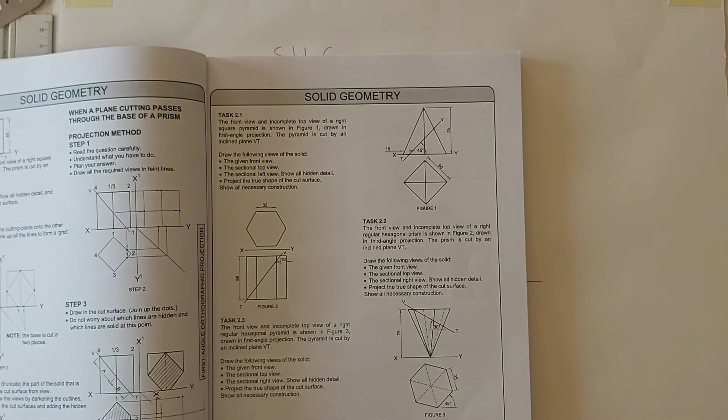This is just a video to help you with your first task that we handed to you. It's the solid geometry, task 1. If you have a look at the task, you will see that they provide you with a front view of a square pyramid as well as a top view.

Now what they ask of you is to do a given front view, a sectional top view, and a sectional left view that will be on the right hand side. Why? Because it's a first angle orthographic projection, and then of course you have to do your true shape.

Right, now just about the question itself, please remember that if they give you the base length, in this instance 50, the base length is from that point to that point. Because a common mistake that you guys tend to make is to measure 50 from that point to that point, which is incorrect. The base length is the base length over here.

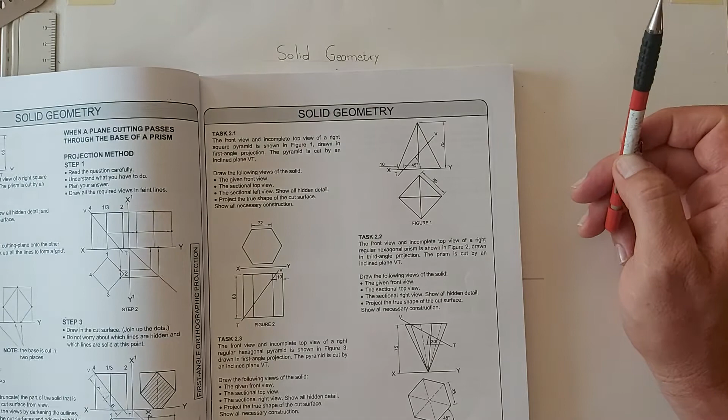Right, the axial length is the height provided here, which is 75. And then you have a cutting line VT, which is provided, and they give you the measurements for you to be able to do this line, which I'll show you how to do now. The measurement is 10 millimeters from there, and then you have to draw this line at an angle of 45 degrees. At this stage you're supposed to already be able to do this drawing, as I already did it, because it's grade 10 work.

As you can see, I already constructed my front view and a top view. Now you will see the top view is very light. The reason for that is very simple. We still have to do a sectional top view, so there will be a part that will be visible and another part which won't be visible at this specific stage.

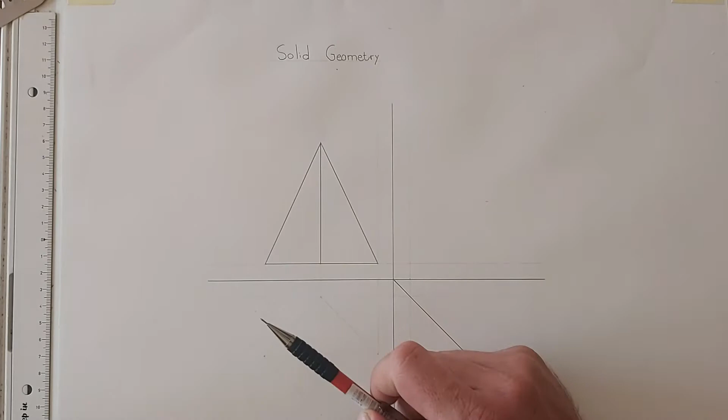Right, so first things first, let's start by adding the cutting plane. For the cutting line, they provide you with a measurement of 10 millimeters to the side and then a 45 degree line. So my first step will be to measure 10 millimeters to the side, and then on that baseline, I'm going to draw a 45 degree line. And I'll name this line VT. It doesn't really matter what you name it, but in the book example, it's VT.

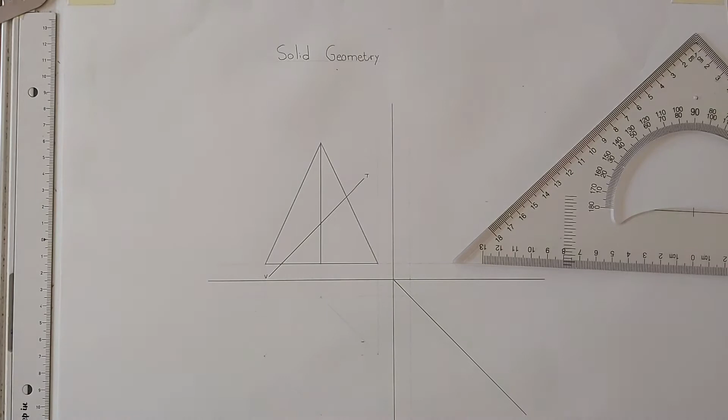Right, now the number one rule when it comes to solid geometry is to number. At a later stage in the drawing, you will see the reason behind the numbering. So let's start off with number 1, number 2, 3, and number 4. Remember this is a corner as well. It's the top point of your pyramid, so I'm going to name that point X.

Now I'm going to do the same on the front view. I'll start on the left hand side, which will be number 1. Then I'll go to the midpoint, which will be 2 and 4 at the bottom, and of course X, which is at the top, and then number 3 on the right hand side.

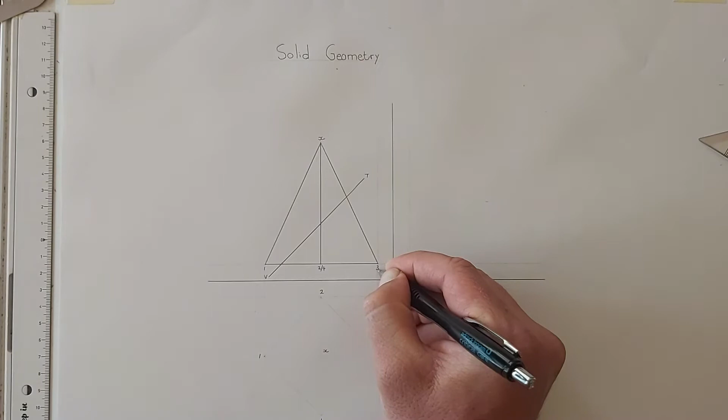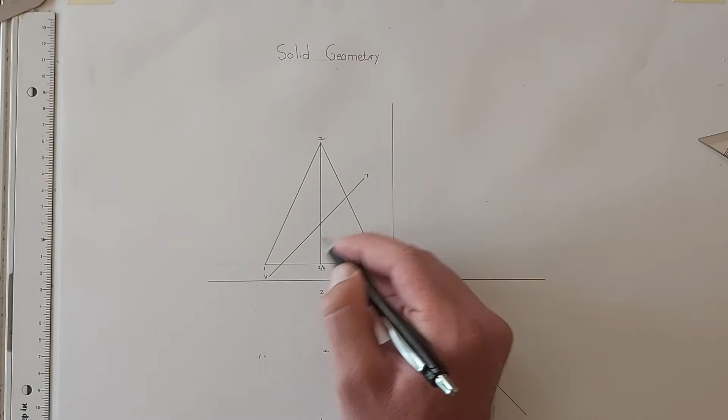Right, now on my solid piece, there are 3 points where my cutting line cuts my solid. The first point over here I'm going to label A, the second point B, and the last one C. Those are the points that I'm going to make use of when I project over to my top view to get my cutting points.

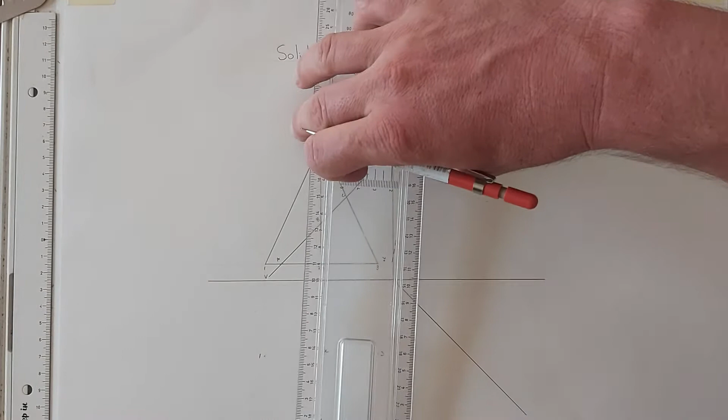So now, first steps first, I'm going to start off by projecting point A, which is this point here, down to my top view. Now you will notice that if I try to project B downwards, it won't have any effect, so I'm going to leave that one out for now. Then I go to point C and project it downwards.

Now this is very important. This is why we need the numbering, because at this stage you will see that between X and 1 there's no cutting point. Thus between X and 1 there won't be any cutting points, but between 1 and 2 and 1 and 4 there is a cutting point, which is cutting point A. So between 1 and 2, it cuts there.

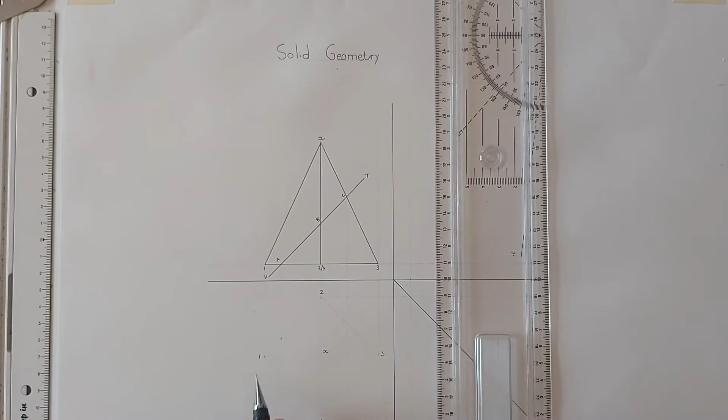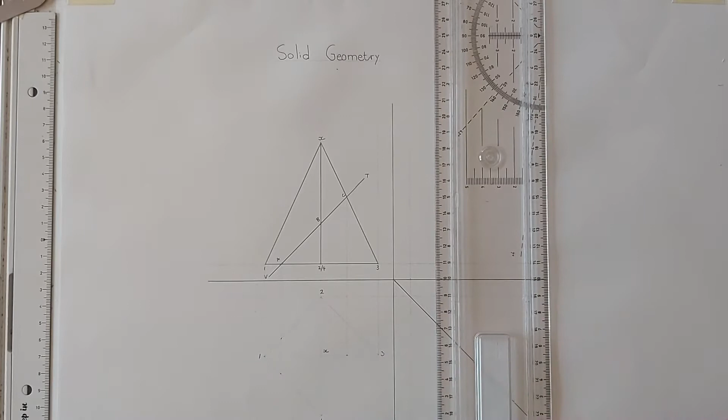Between 1 and 4, it cuts there. So that's my 2 cutting points. Right. With B, as I mentioned, no effect, which we'll get to at a later stage. Okay, now I'm going to C between X and 3. If I project it down between X and 3, this will be my cutting point. Okay, so now I've got 3 cutting points, but I still need cutting point B.

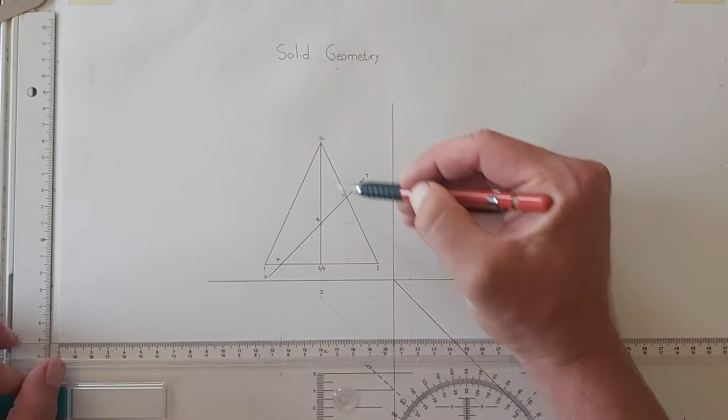Okay, for me to be able to construct that, I have to make use of my projection lines again. So I'm going to project point B over to a line that's at a slant. In this case, I'm projecting it over to line X3. There it makes contact with line X3. I'm going to project it down 90 degrees. So I'm projecting it down to line X3 again, as it is over there.

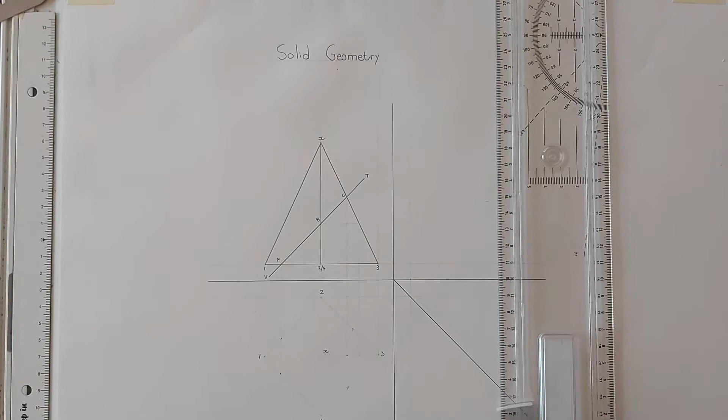Now, my next step, parallel to this side and parallel to this side, I'm going to draw a line that makes contact with that point that I just determined. Okay, so I'm projecting this line over, and I'm also projecting this line over. Constructing 2 parallel lines. So that line is parallel to that line, and this line is parallel to this line.

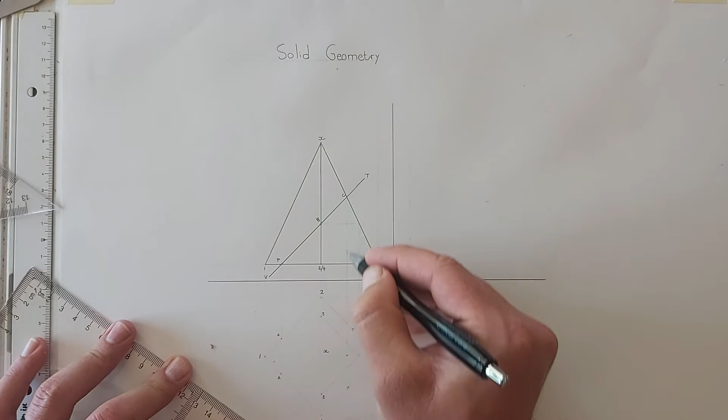Okay, now there where it makes contact with X and 2, because remember B cuts on X2 and X4. So X2 cuts there, and X4 it cuts there. So now when I've determined all those points, now I'm going to connect all of them. Okay, to simplify it for yourself even more, you can do the following. Say, right, this point here is A and A. You can do it as you like. This point here is B and B. And this one here will be point C. Okay, now I'm going to connect all of these points with one another.

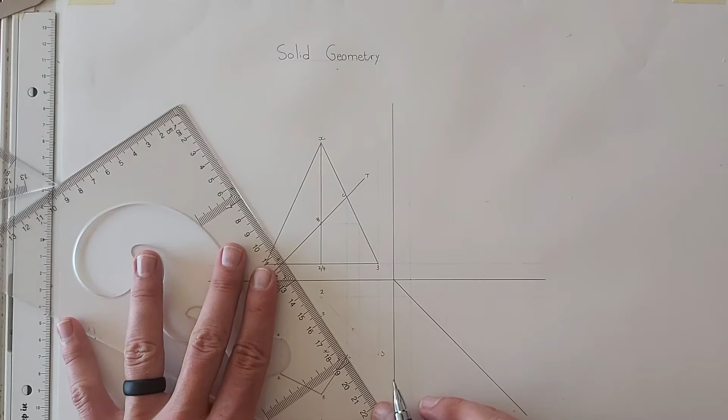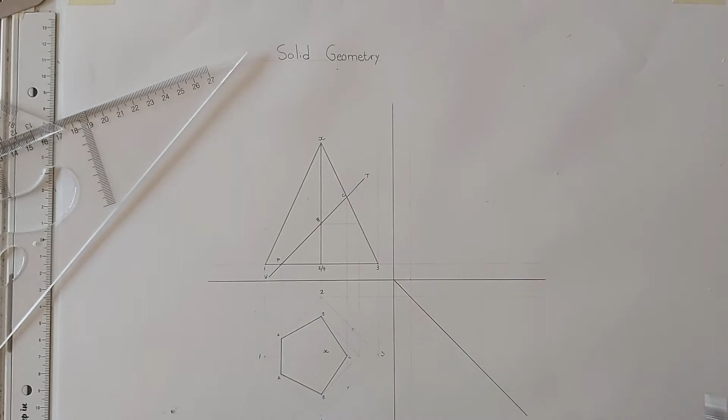Right, so this will then be referred to as my cutting plane. Right, now this cutting plane has to be hatched. Okay, so I'm going to hatch it. Remember, when I do my hatching, it should always be at an angle of 45 degrees. Okay, so I'll start off by getting my first reference line, which is at the angle of 45 degrees.

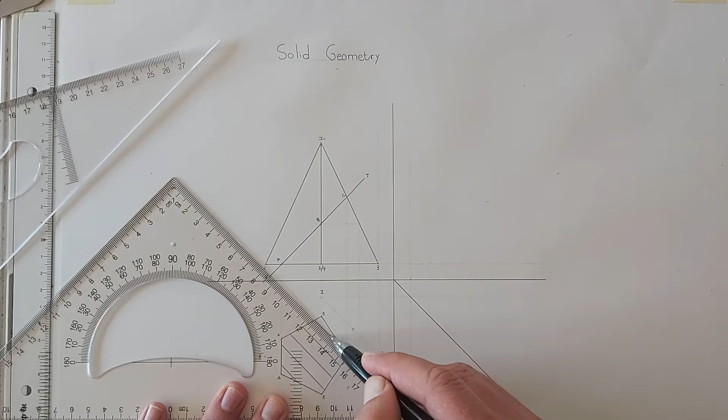Now, to ensure that the spaces in between my lines are equal, I'm just going to shift this so you can see these lines over here on my set square. I usually use either that line or this line or that line, depending on the size of my plane. So now you can see, for reference sake, I'm going to use this line. So where this line that I just drew makes contact with that point there, I'm going to draw my line. Now I'm shifting it over again up to the point where it makes contact. Once again, that space. So now if I remove my set square, you will see that the spaces in between my hatching are equal.

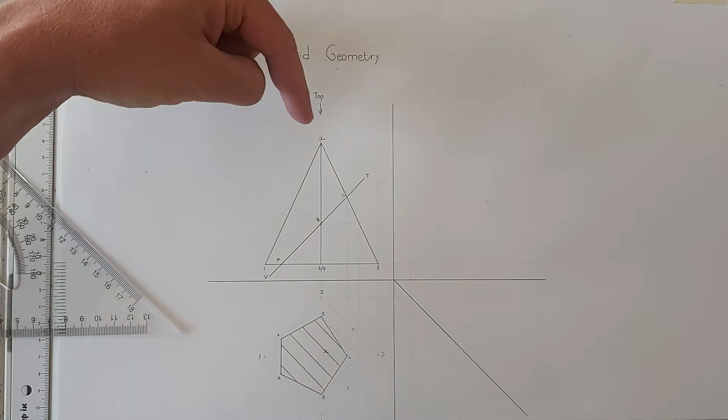Okay, now the next part is very simple, but you have to keep track. Okay, I'm going to see my top view from there. This is my top view. Now, to be able to see this cutting plane, if I see it from the top, this top part has to fall away. If this top part doesn't fall away, I won't be able to see the plane, because if I let the bottom part fall away, this plane will be at the bottom. Okay, so I won't be able to see it. Right, so this top part has to fall away, thus this part stays.

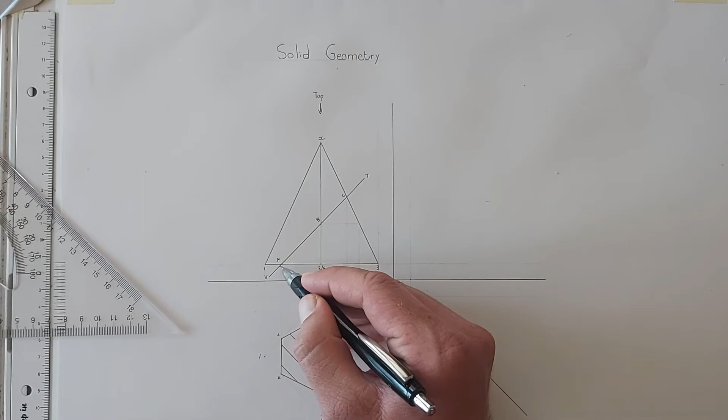Right, now how am I going to do that? I'm going to start with A. That's my first point. Right. From A to 2 and from A to 4, it's still there. So it will be a visible line. So what I'm going to do is I'm going to say from A to 4, as well as A to 2, those will be visible lines.

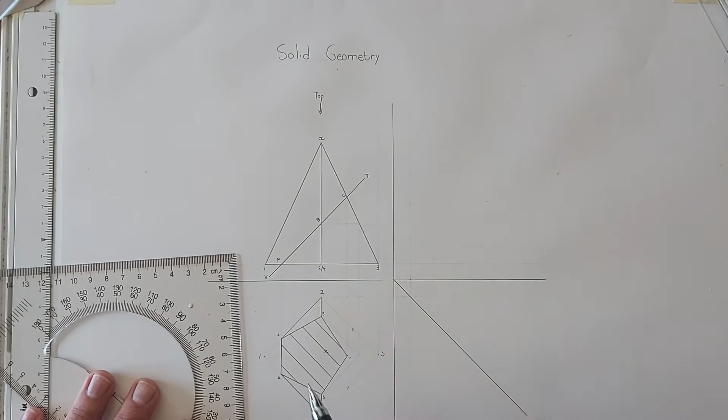Right. From B to 2 and B to 4 will be visible lines as well. So B to 2, B to 4 will be visible as well. Okay, right, from 2 to 3 and 4 to 3 will be visible as well. So 4 to 3, 2 to 3 will be visible as well. So I'm going to draw them in.

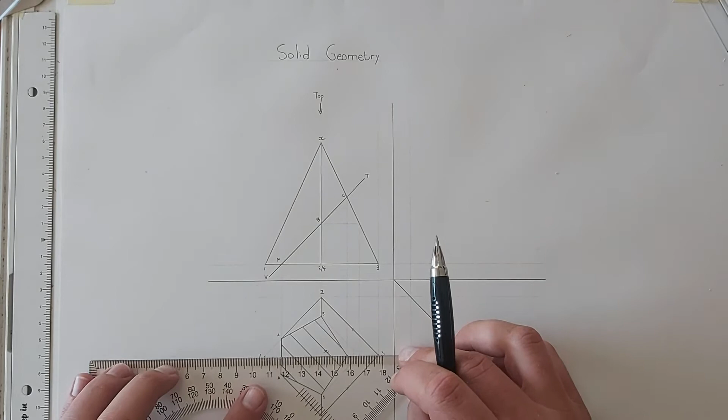And then the last one from C to 3. So from C to 3 will be a solid line as well, a dark outside line. Right, so this is basically what my top view will look like of this sectional square pyramid if this part falls away and I see it from the top.

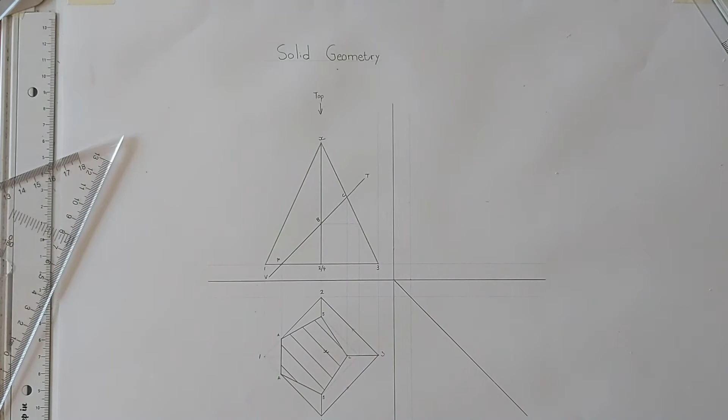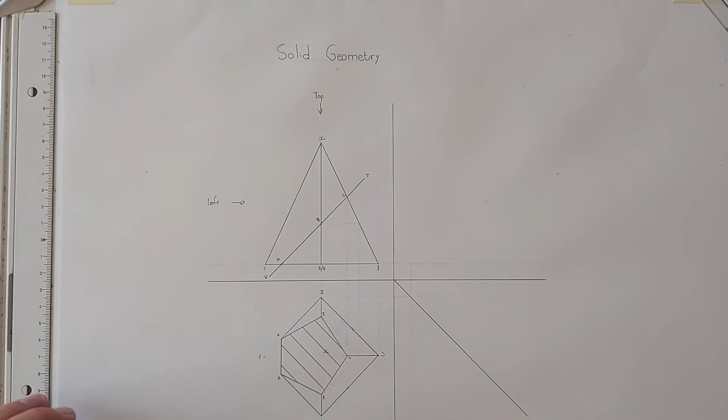Right, now my next step, very simple. By means of projection, I'm going to construct a left view. Thus, how will this drawing look if I see it from the left hand side? Right, so start off by doing my constructions for my projection. So I'm projecting all of these points over to my 45-degree line. Look at that, they're all there.

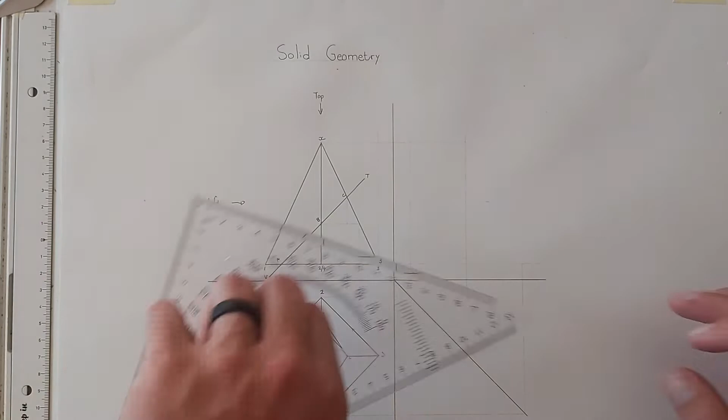Now you can either measure the 75 or you can just do this. I'm going to project the 75 millimeters over. Then I have my height. Okay, so once again, by means of light construction lines, I'm going to construct my square pyramid. So this will be my left view.

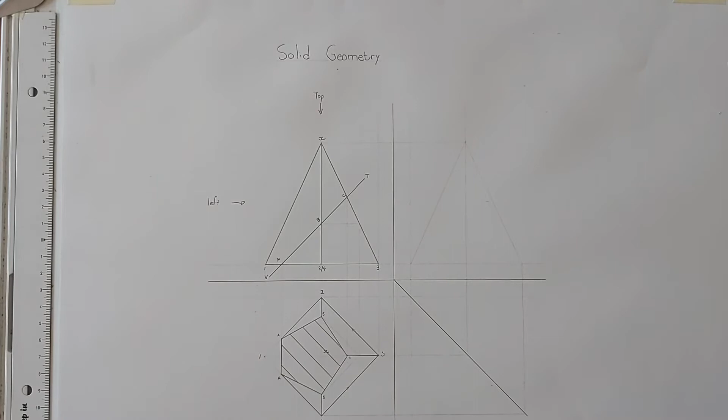Now, very important, number 1 rule, numbering. Right, so this will be point number 2. This one will be 1 and 3. And this one over here will then be number 4. And the last one I need to add is point X, which will be at the top.

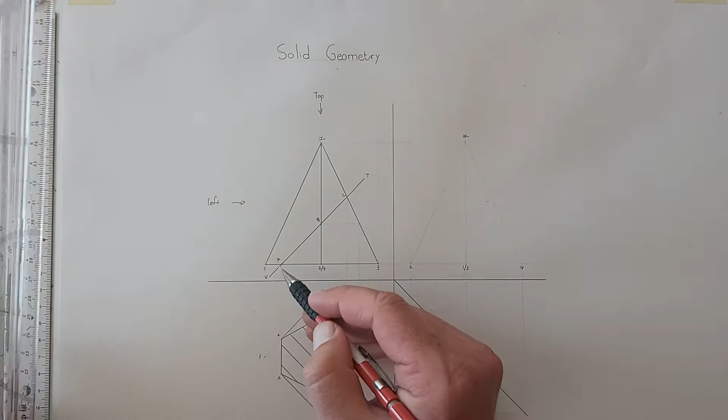Right, now I'm going to project over A, B, and C to my left view. Now you will see that if I try to project A over, it won't have any influence. I won't be able to see any lines, so I'm just going to leave that one for a while, then I'll get back to that one. So, B, I will project over, and C, I will project over.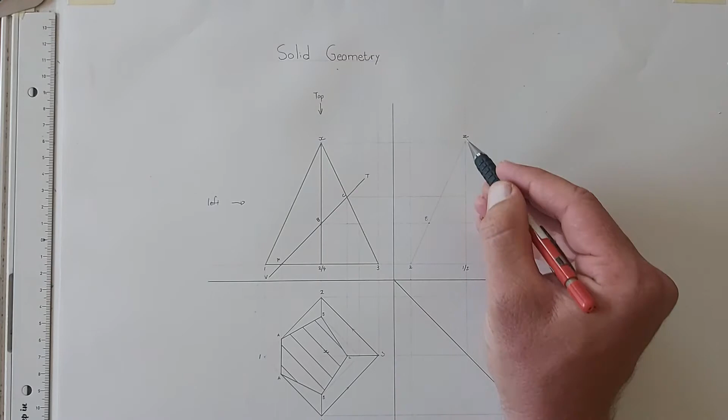Right, now, this is the easy part, once again. Between X and 2, and between X and 4, when B cuts there. So between X and 2, I follow my point. That will be my point B. And as well, X to 4, there where it cuts, that will be my point B. Now I'm going to go over to C, between X and 3, cuts there. So that will be point C.

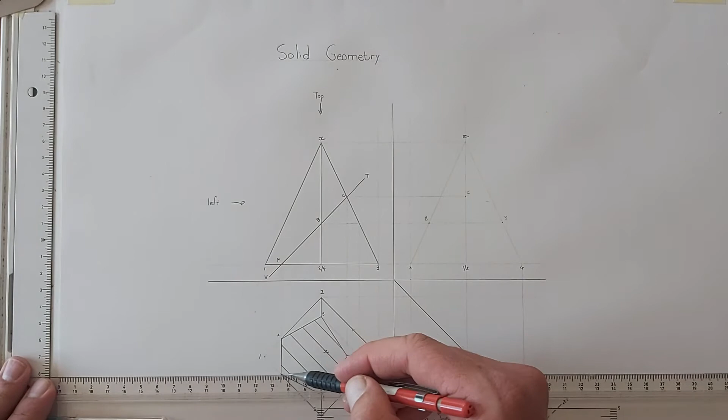Now I still need to determine point A. Right, so what I'm going to do, I'm going to follow it down from our top view. Those 2 points that I already determined, I'm going to project those 2 points over to my 45-degree line. So I'm projecting this line and that line. Right, there where it makes contact with my 45-degree line, I'm going to project it upwards to the base.

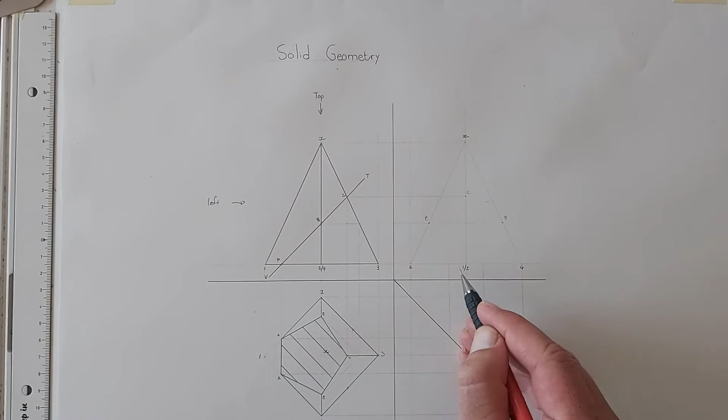Now, if you refer back to the top view, between 1 and 2, point A cuts there. So I'm going to follow it over. Between 1 and 2, it cuts there. So that will be my point, which is A. Okay. Between 1 and 4, it cuts there. So I follow it over. Between 1 and 4, it cuts there. So that will be my next point, A, because there's 2 point A's. Right. Now, once again, I'm going to connect all my points.

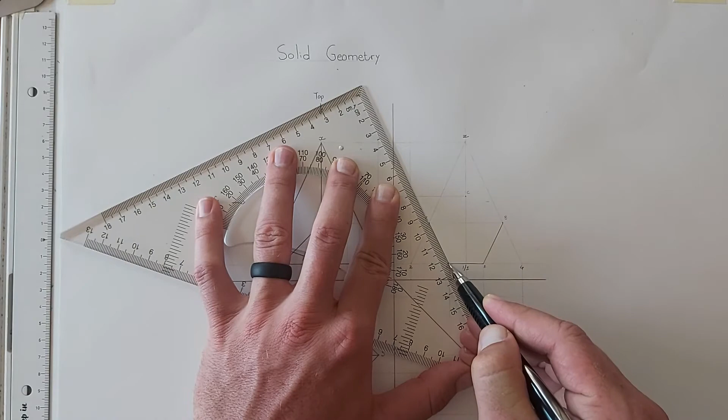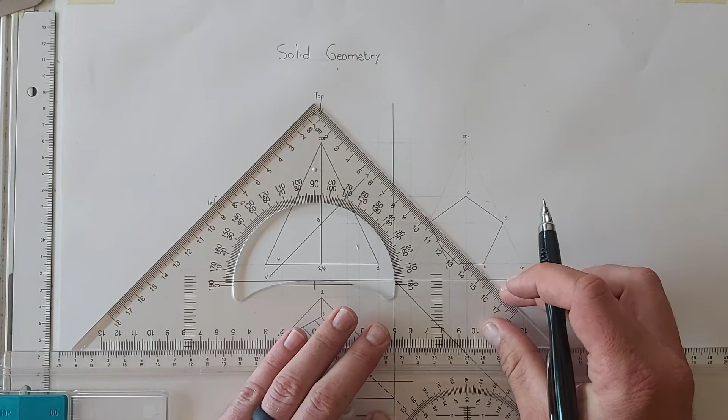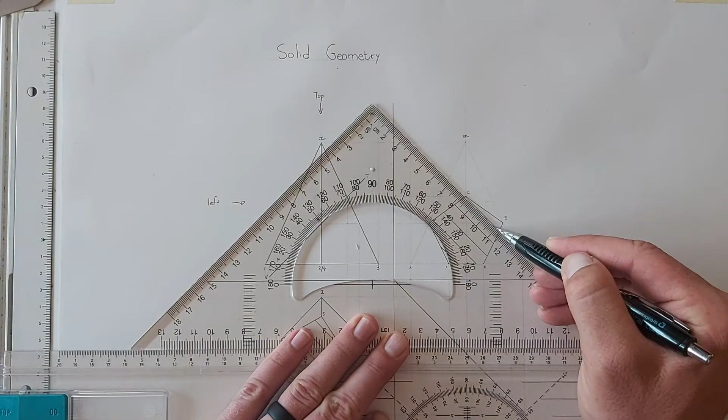And once again, I have my cutting plane as seen from the left hand side. Okay, next step in the cutting plane, of course, is to hatch it. So I'm going to hatch again my first reference line. Okay, and then from there on forth, to ensure that it's the same width the whole time, I'm using that length there. Okay, right, so now that's my cutting plane.

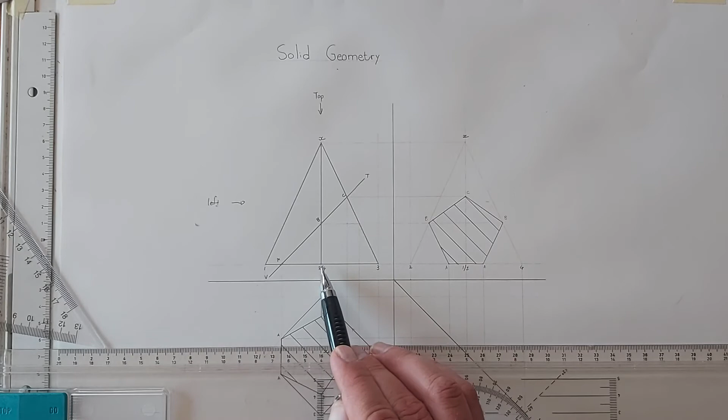Now, if I see it from the left hand side, once again, this top part has to fall away for me to be able to see the cutting plane. Right, so this part falls away, this part stays. I'm going to say from the cutting plane to the cutting point to 2 and the cutting point to 4 will be visible. So cutting point A to 2, cutting point A to 4 will be a visible line. Right, from B to 2 and B to 4, visible.

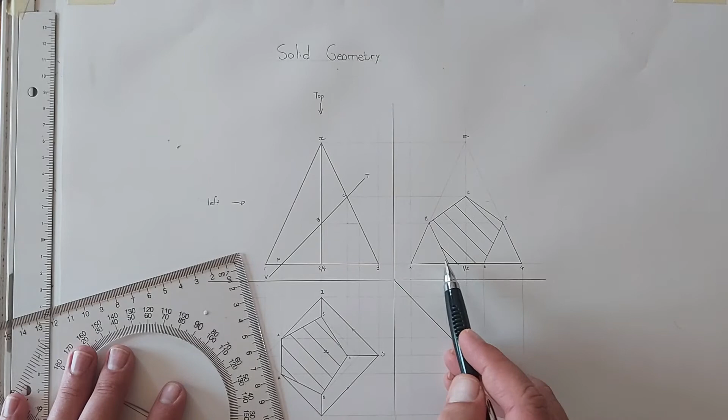Okay, 4 to 3 and 2 to 3 is at the back. So due to the fact that that line is already there, you won't be able to see it, so you don't have to draw it in. Then C to 3, still a line that has to be drawn in. But if I see it from the left hand side, it means that this line won't be visible. But remember, a line that's invisible to the eye at this specific stage, but you know is there, will be a hidden detail line. So I'm going to add a hidden detail line from C to 3.

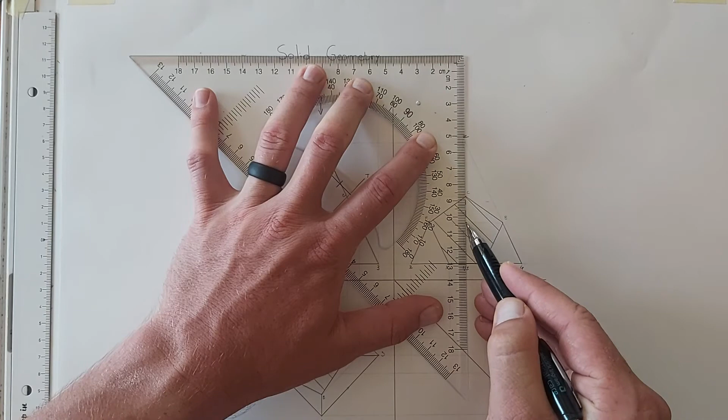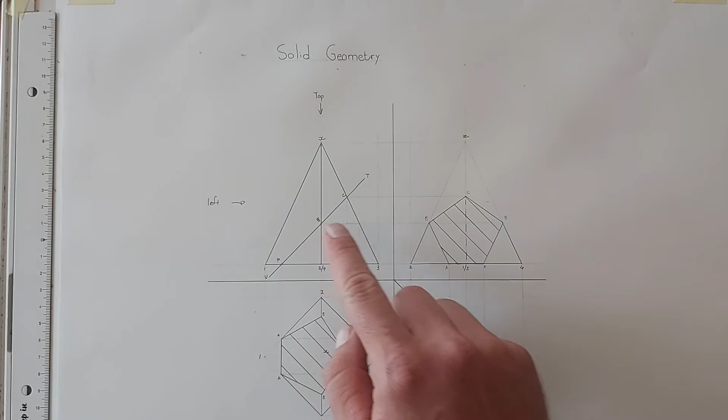So that's my hidden detail line at the back. Right, so now we've constructed the front view, the sectional top view, the sectional left view. So the last part that we have to do is the true shape. Now, the true shape is very simple. The true shape is basically what this plane will look like if I see it 90 degrees from the top. Okay, so that's seeing it directly from the top, what this plane will look like.

Now, there's two ways to do it. The one is out of the sectional cutting plane. Okay, and the other one is just if you don't have space, you can do it in any other way. I'm going to show you both the ways, and then you can use any of the two, whether you have the space or not. Okay, but for me to do this, I have to take out these two notes, so bear with me.

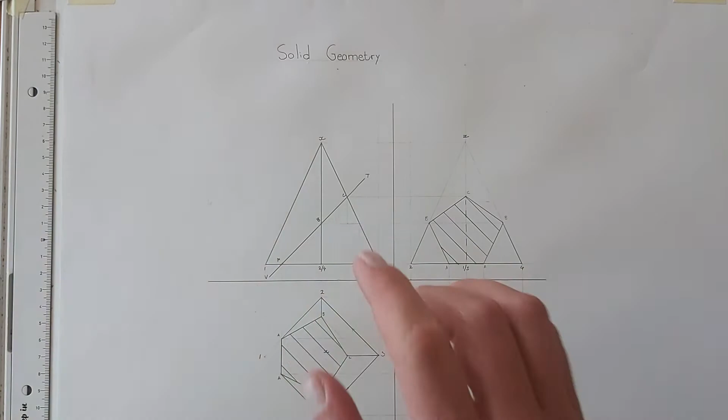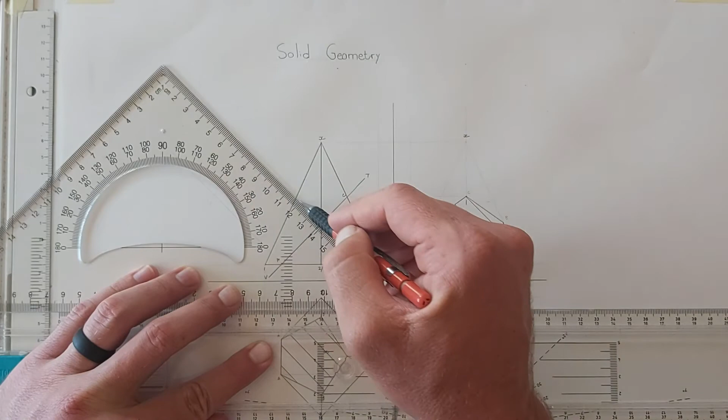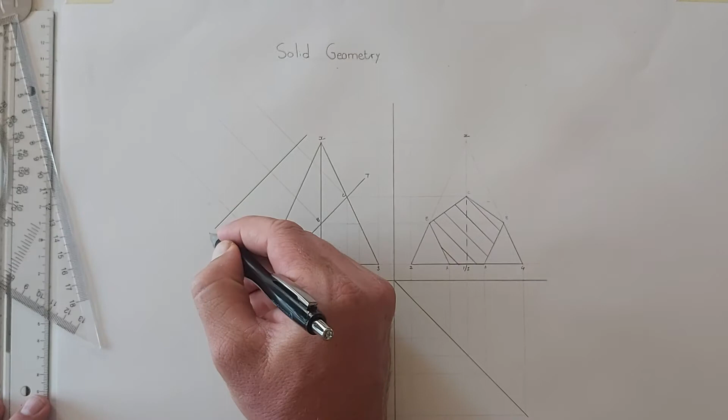Right, so my first step, out of point A, B and C, I have to construct 90-degree lines out of those 3 points. And then parallel to this line, I'm just going to draw myself a new reference line that I'm going to make use of, which I'm going to name X1, Y1. This is the line that we're going to make use of when we do our measurements. X1, Y1.

Right, now, remember you have a vertical as well as a horizontal axis. Okay, now, when we do this next part, you have to remember that you have to make use of the axis the whole time, right? Okay, so you can't with one measurement use the axis, and with the next one use this one or use this one. Okay, you have to use the axis the whole time.

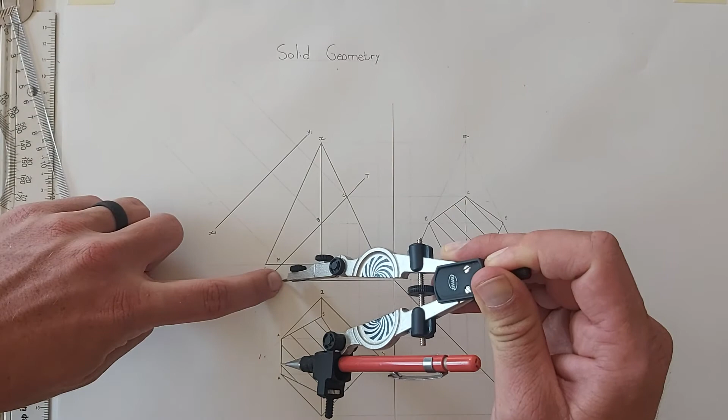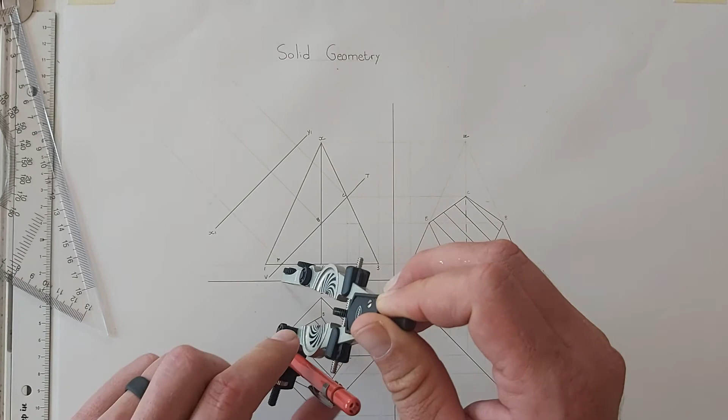Okay, so I'm going to start with point A. On point A, there's 2 points that I have to determine. So I'm going to start, as you can see, on the axis line. Okay, on the axis line. From the axis to point A, that distance, as you can see, I have it. Now I'm going to transfer it to X1, Y1 to line A. I'm going to draw my first line. So that will be my first line.

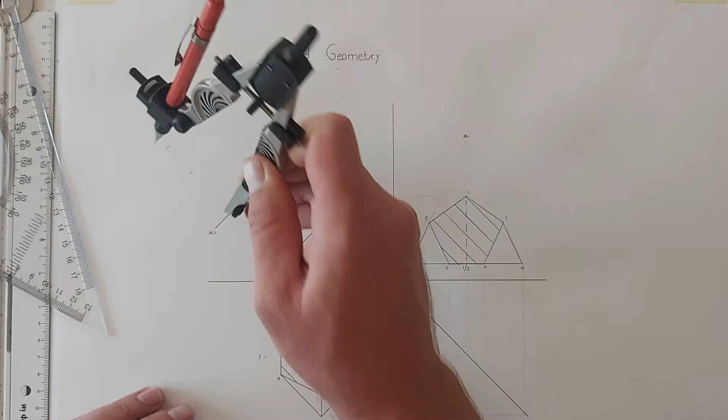Now I'm going to go over to B, once again, from my axis line up to the next point. Okay, so on this line, I'll get my next point A. So this will be A and A once again. Okay, so these two A's are the same as these two A's over here. Okay, just quickly have to extend this line.

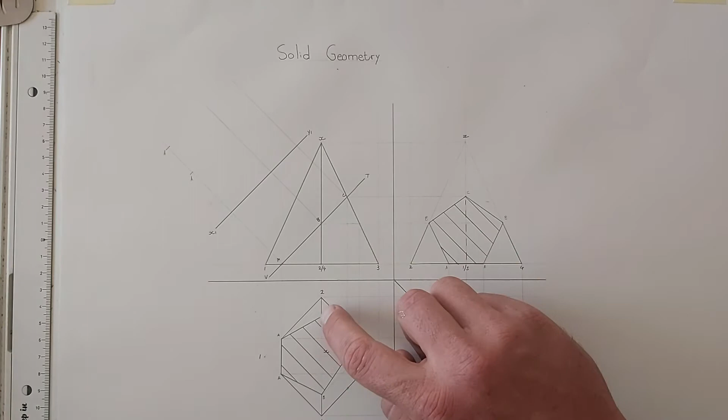Okay, now I'm going to go over to point B. Point B, once again, there is 2 points. Okay, once again, on my reference, on my axis. Okay, that's the line I'm going to work from. Okay, so from the axis to point B, that distance there, as you can see, I'm going to transfer it to my X1, Y1 line. So that will be my first point, B.

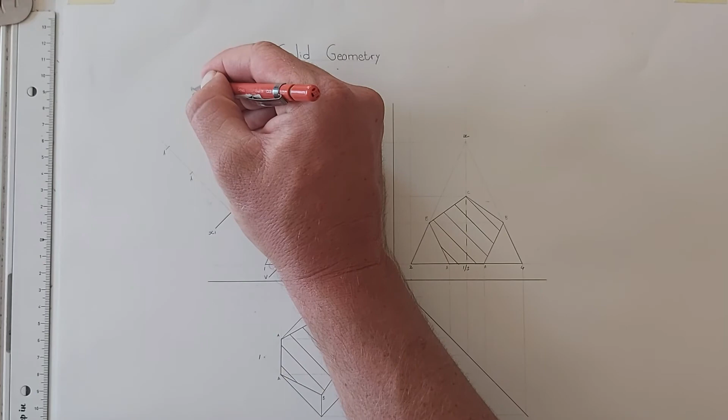Now I'm going to go over to the next point, B, on my axis line. Make sure that it makes contact with that point. X1, Y1 line, get my mark. So that's my next point, B. So I've got AA, BB. Now I just need point C.

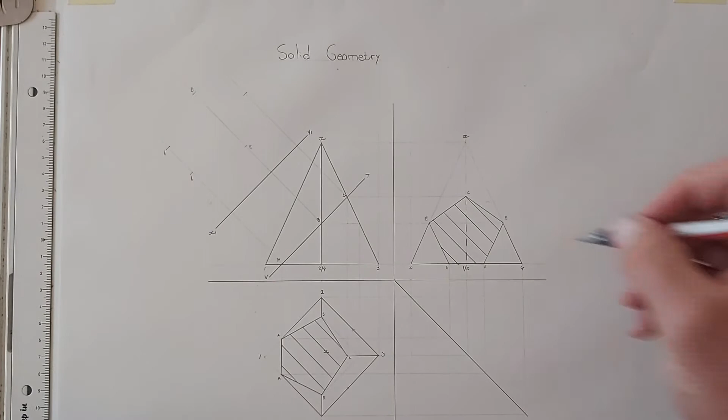Okay, so I'm going to, once again, on the axis, make sure it makes contact with C. Put it on my X1, Y1 line, get my mark, and that one will be point C. Right, when I have all 5 those points, I'm just going to connect all of them, and then I'll have my true shape.

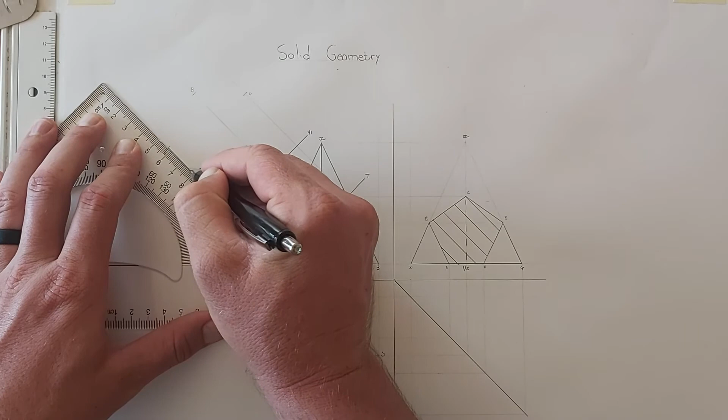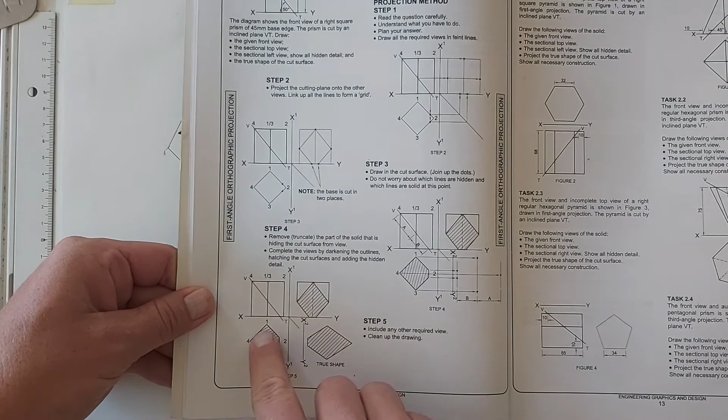Now when I'm finished with this, there are a few people that differ. Some people say that you have to hatch the sectional view. Other people say you don't have to. But if you look at Jacques van Leeuwen's book with the exercises that are provided in the Van Leeuwen book, you will see that his true shape is hatched. So that's why I'm going to hatch mine. It's just for the sake of doing it. Okay, if you do it, then at least you know that you are safe.

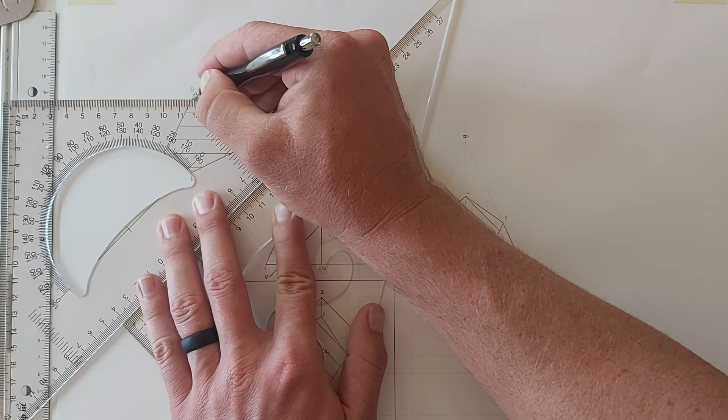Okay, so now I'm finished with my true shape on this drawing. Right, now remember I referred to the fact that you won't always have sufficient space to be able to do your true shape like I just did it here. So what I'm going to do is I'm going to show you an alternative way. The alternative way is you can either do it vertically or horizontally, doesn't really matter. I'm going to do it over here. I'm just going to draw a horizontal line.

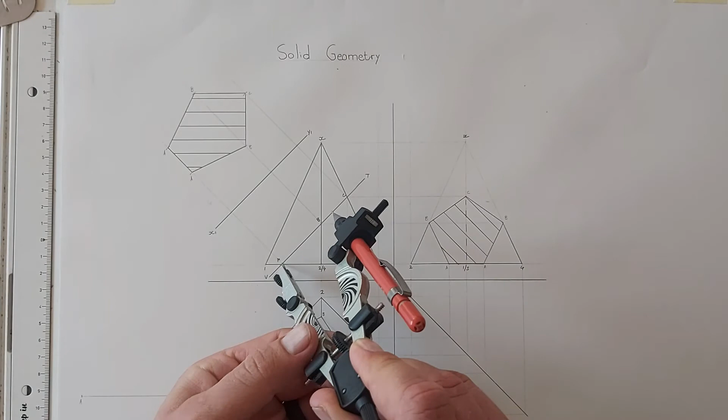Okay, and now once again, this is why the labeling is very important. A will be A over there. Okay, so I've got A over there. Now I'm going to go over to B, because I want to replicate this line over here. So what I'm going to do is take my compass, put it on point A, make sure that it's the same distance from A to B, so that I can transfer A to B over here. So now I know that this is point B.

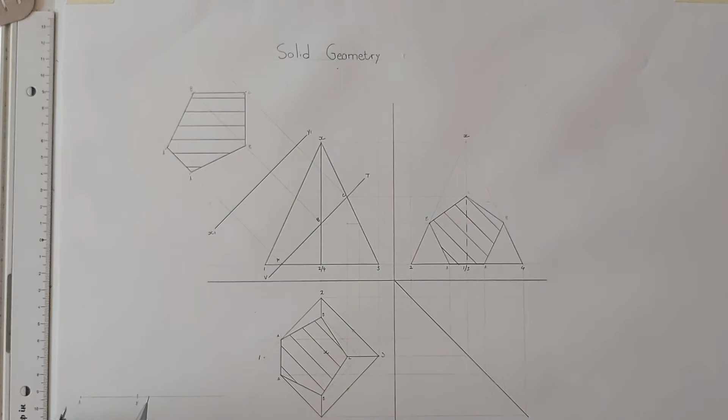Now I'm going to go over from A to C. Okay, so this distance from A to C, so this will be point C. Now, if you really want to, you can erase that extra piece of line that's not supposed to be there. Okay, so now basically in short, what I did is I replicated this line over here.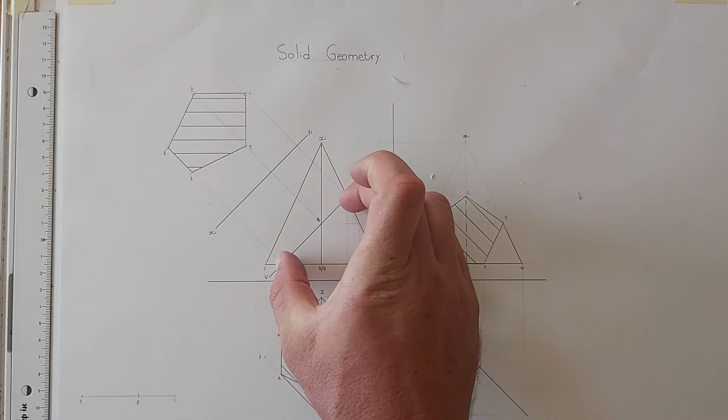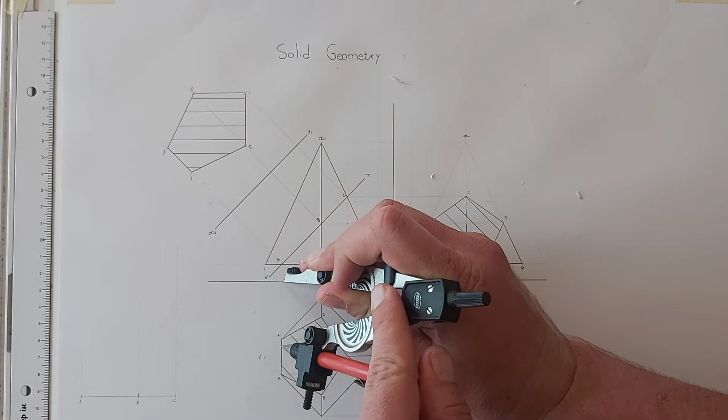So on this line, the same as here, 90 degrees out of that line, I'm going to draw myself some lines over here. And now you will see the application between the two is the exact same. Once again, on my axis, my first point A, I'm going to determine the distance from axis to A. So on this line A, I'm going to get my mark. So that will be my first point A.

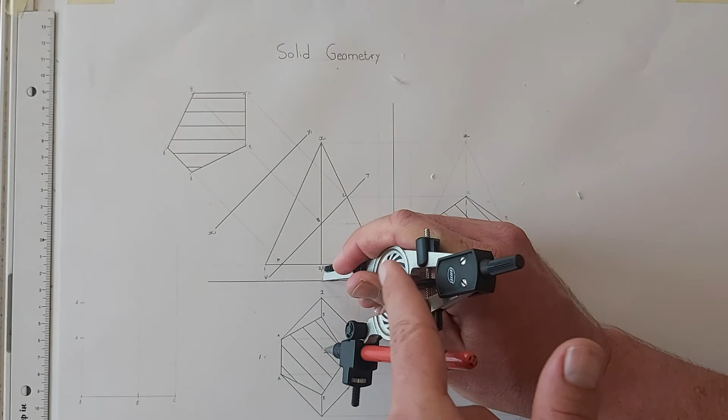Okay, now I'm going to get my second point A. So on my axis line to my second point A, that distance, transfer that measurement over there, and that will be my second point A. Now I'm going to go over to my 2 point B's. Once again, I'll work on my axis line. My axis line is my reference line. So my axis line to my first point B is that distance. I go to point B. So that's my first point B.

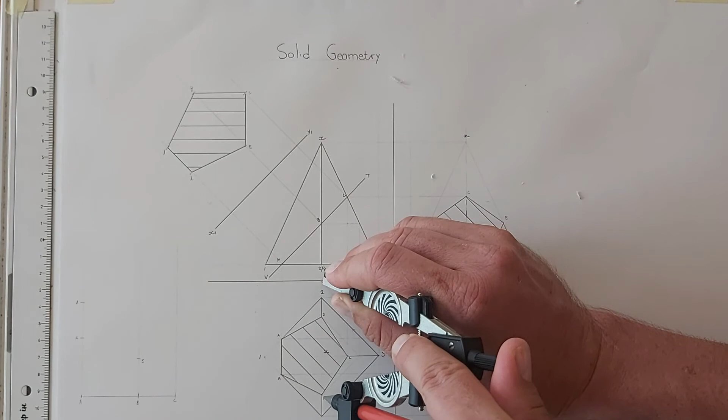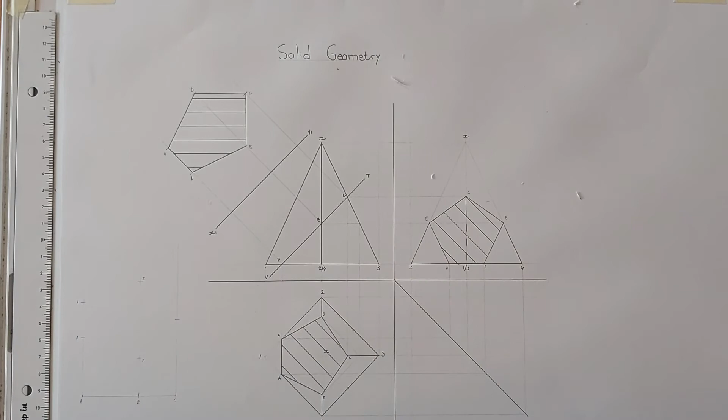Now I'm going to go over to my second point B, on my axis line to point B. That's the distance. I'll put it on point B again. So that will be my second point B. Now the last one will be point C. So I get the distance from my axis line to C, put it on point C, get my mark, and that will then be point C. Right. And I'll finish with that. Once again, I'm just going to connect all of them.

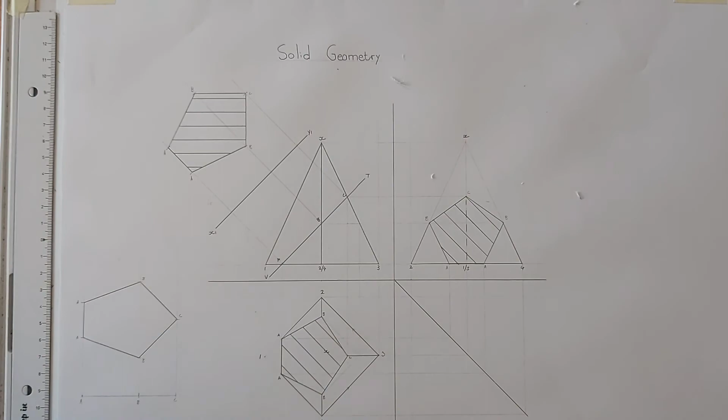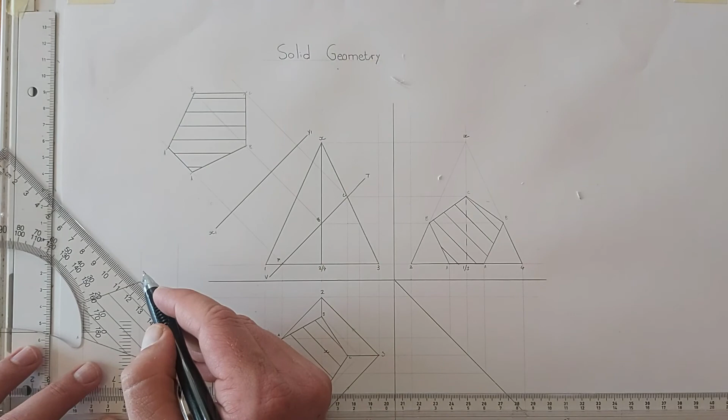Once again, there's my true shape. So all I have to do now is just add my hatching. So again, my reference line with the hatching. I'll make sure it makes contact there so that my hatching is the same throughout. And that is the total of my drawing.

Right, let's quickly recap. For me to be able to get my front view, I need to first construct a top view. Now, I only constructed my top view with light construction lines because there's a certain part that's going to have to fall away. With my light top view, I was able to construct my front view with my cutting line. After that I identified my cutting points. At this stage it's A, B and C. Then I projected down A, B and C to my top view and I got my cutting points.

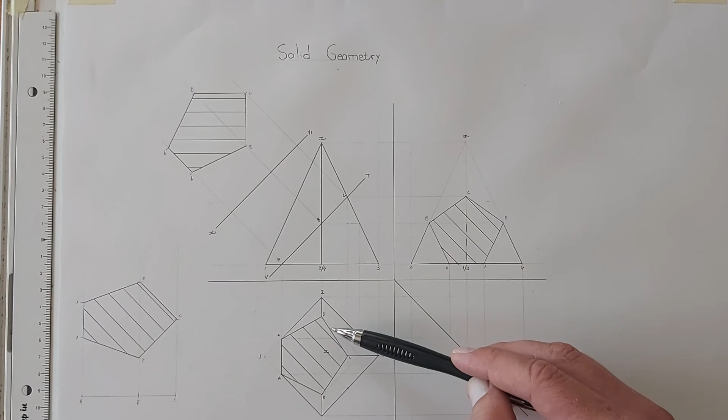But B I was only able to identify by projecting it over to one of my sides, bringing it over parallel to those two sides. I drew myself parallel lines and I got point B. Top view finished. Went over to my left view by means of construction and projection. I projected all my points over to my left and I got my left view with its cutting plane. Do remember about your hidden detail at the back, right?

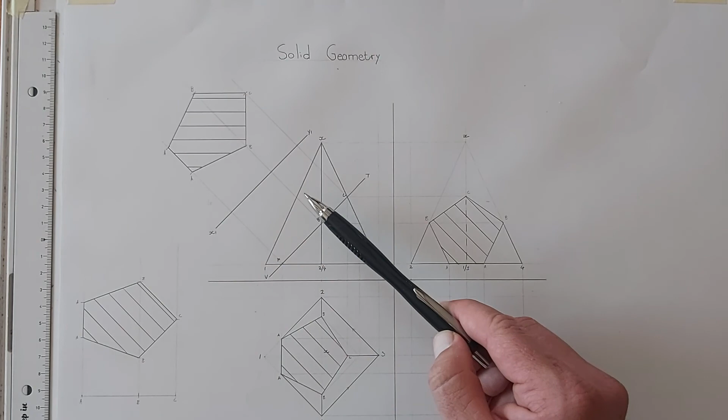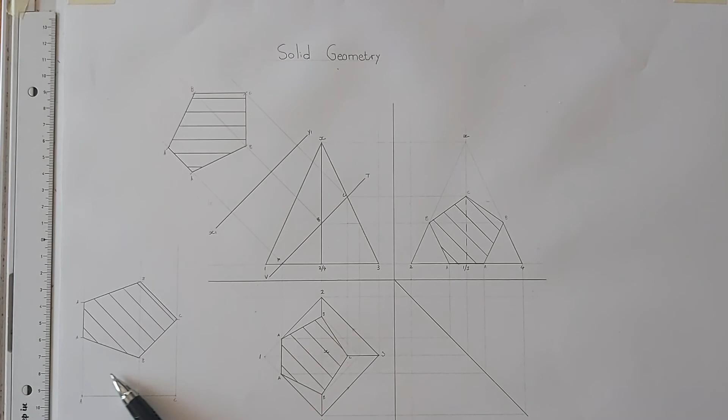My two methods, or my two true shapes. The one is out of my cutting line. So I drew 3 lines out of A, B, and C out of my cutting line, 90 degrees. I got myself a new reference line, which I used to do my true shape. Now I got myself a new method. If there's not sufficient space over here, you'll be able to do a horizontal, a vertical, a 45 degree, doesn't really matter. Just as long as you replicate this ABC in accordance to ABC over here, 90 degrees out of that line, and I followed the same steps that I did here, and I was able to construct my two true shapes.